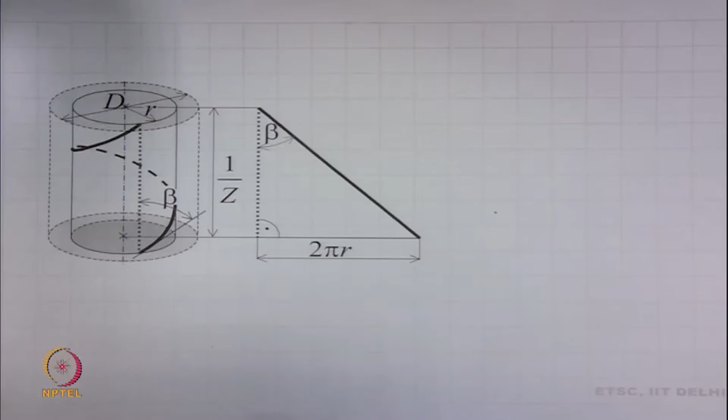Helical model of fibers in yarn. We recapitulate this model. A general fiber is situated at a radius r in the yarn. It makes an angle beta from the yarn axis. If we cut the yarn along its axis and unravel it, we obtain this triangle. The base of the triangle is 2 pi r and the height of the triangle is 1 by z, where z denotes yarn twist and beta is this angle.

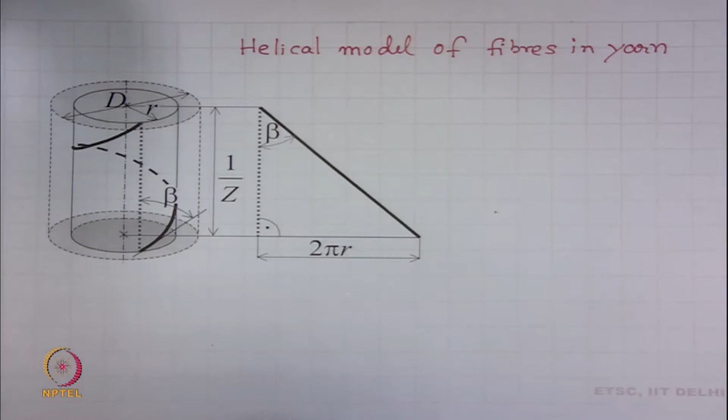So, if we apply trigonometry, we can find out tangent of beta is 2 pi r times z. Now, of course, there will be a fiber which is situated at diameter d as well. In that case, for that fiber we will write tangent of beta d is pi times d times z.

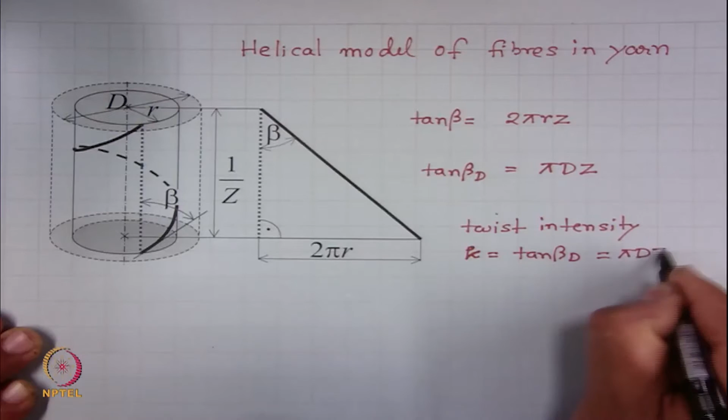In theory of yarn, this quantity has a name which is known as twist intensity. Generally we denote the symbol kappa for this, which is equal to pi times d times z. This is a very well known expression, as we know from helical model of fibers in yarn, and we consider helical model of fibers in yarn in this module too.

Now, what is yarn shrinkage? Let us first define this. A cotton yarn contracts its length due to washing. This phenomenon is called yarn shrinkage.

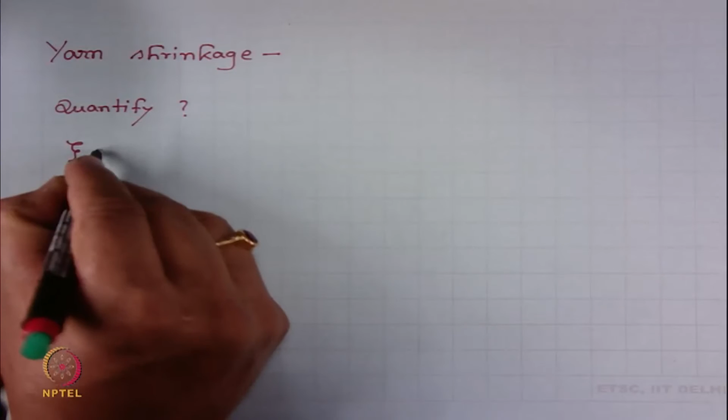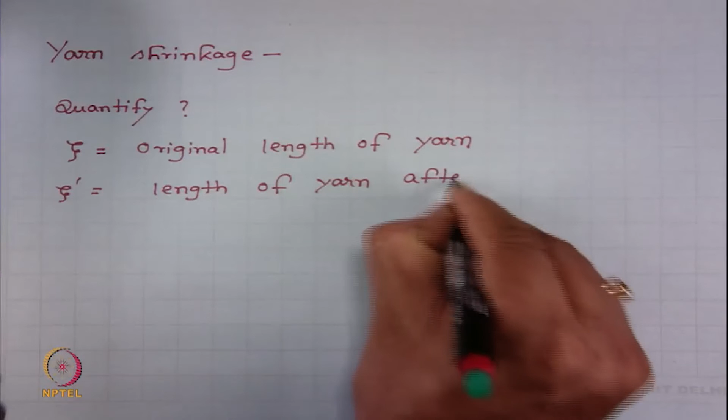How do we quantify this effect? Let us consider zeta is the original length of yarn. If we wash this yarn in hot soap solution, then its length will shrink. Suppose this is the length of yarn after washing and drying.

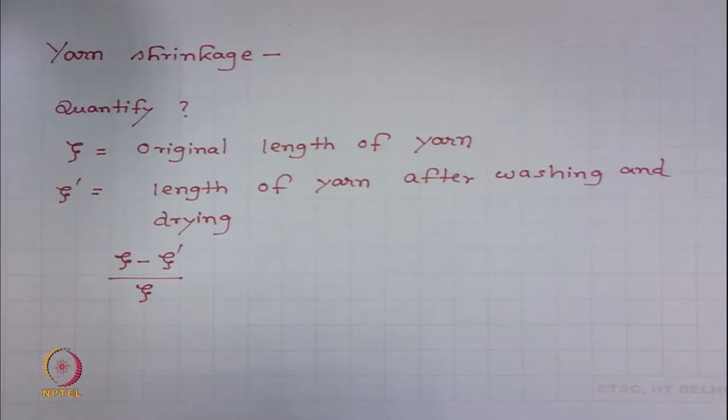So, what is the change of length? Zeta minus zeta prime is the change of length, divided by original length. This is how we quantify shrinkage. Phi is yarn shrinkage. So, yarn shrinkage is defined by the change in length due to washing divided by original length.

We can write this further as this. So, this is how we define yarn shrinkage.

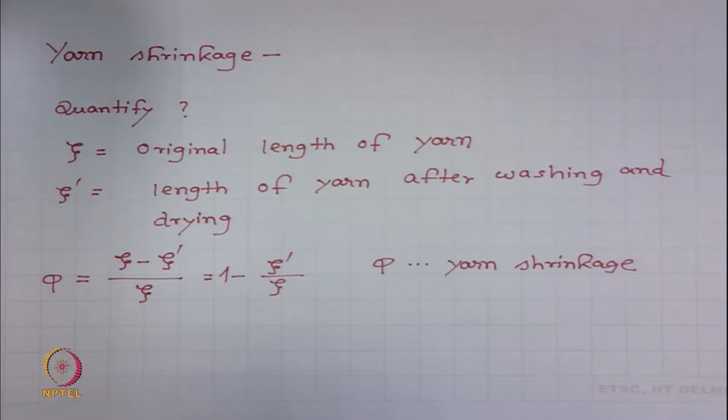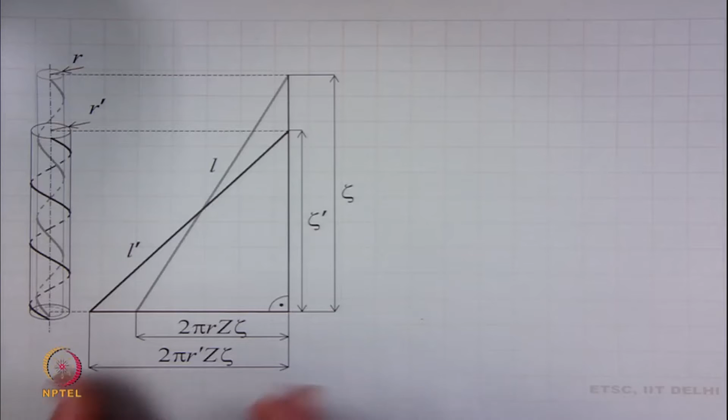After washing and drying, the same fiber will have a different length. Let us consider that length is L prime, and of course the radius will change. So this base will be now 2 times pi times r prime z into zeta, and this length is L prime. We consider the number of coils z times zeta does not change because of washing and drying.

So, if we apply now the Pythagorean theorem to the initial fiber length, L square will be equal to zeta square plus 2 pi r z zeta, square. Similarly, if we apply the Pythagorean theorem to the triangle after shrinking, then we will obtain L prime square equals zeta prime square plus 2 times pi r prime z, square. This equation, the second one, can be written in this form.

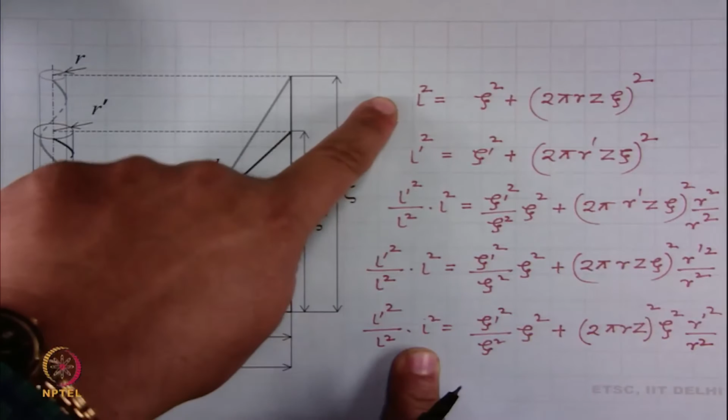Now, this L square we will substitute from this equation. So, what we will get is L prime square by L square zeta square plus 2 pi r z zeta square. This is equal to zeta square plus 2 pi r z square zeta square r prime square by r square.

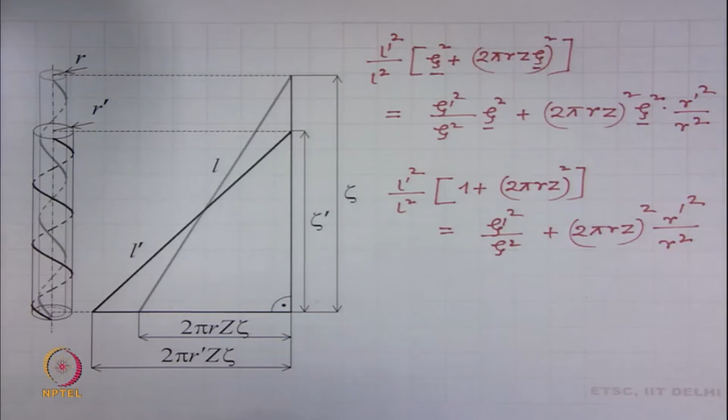Now, in all these quantities this is common, so it can be removed. So, what we get is 1 plus 2 pi r z square is equal to zeta prime square zeta square plus 2 pi r z square by r square.

So further we can write this expression, this plus 2 pi r z square into this by this is equal to plus 2 pi r z squared by r square.

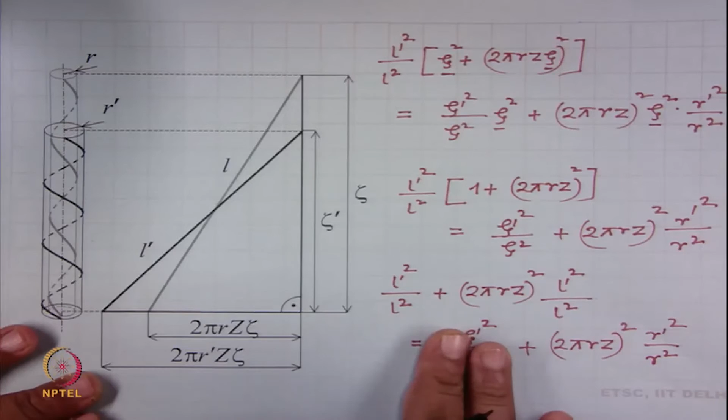Now this equation we can further write as, so what we do in the earlier expression, now this expression is somehow related to shrinkage. So we will keep it in the left hand side, rest all in the right hand side. If we do so, then we obtain is equal to minus this.

All right, how we define shrinkage? Change in length by original length is equal to this. So this by this is equal to one minus this, isn't it?

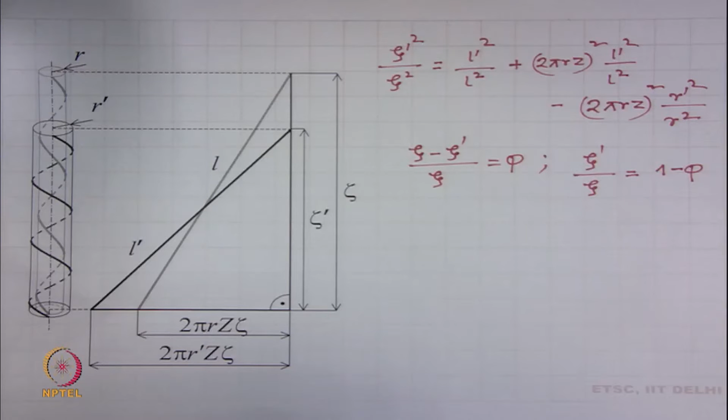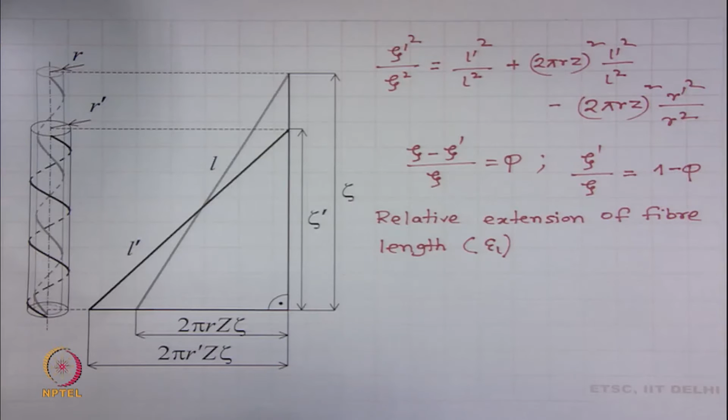We now introduce two quantities. One is relative extension of fiber length. We symbolize it by epsilon subscript L. How we define it? Change in length divided by original length. So L prime by L minus 1. So L prime by L is equal to 1 plus epsilon subscript L.

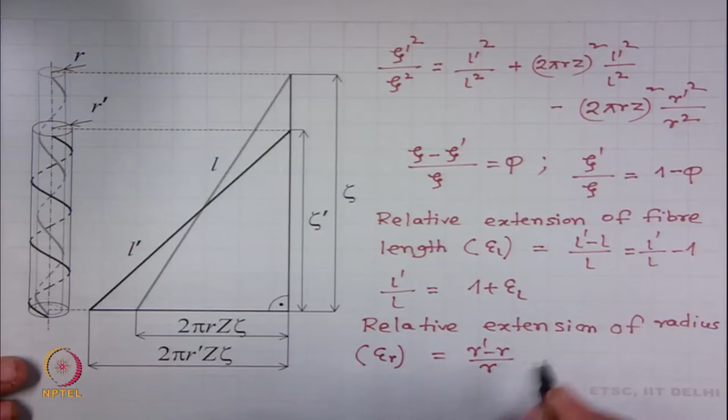We also introduce another quantity here, that is relative extension of radius, epsilon r, change in radius by original radius. So we can write plus this.

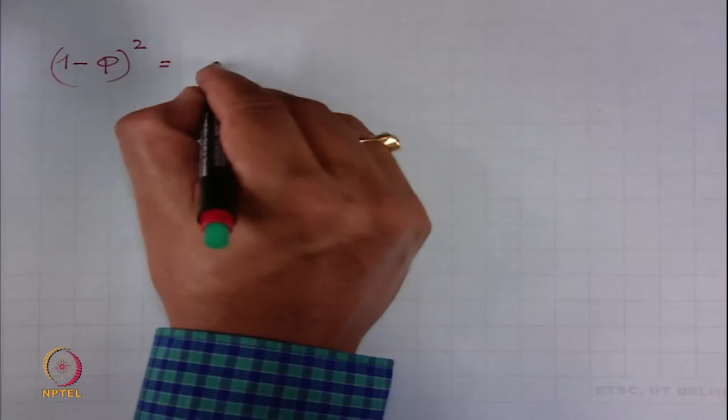Now these three expressions we substitute here. So this becomes 1 minus phi square. So finally we obtain is equal to L prime by L is 1 plus epsilon L square plus 2 pi r z square common L prime by L minus 1 plus epsilon r square.

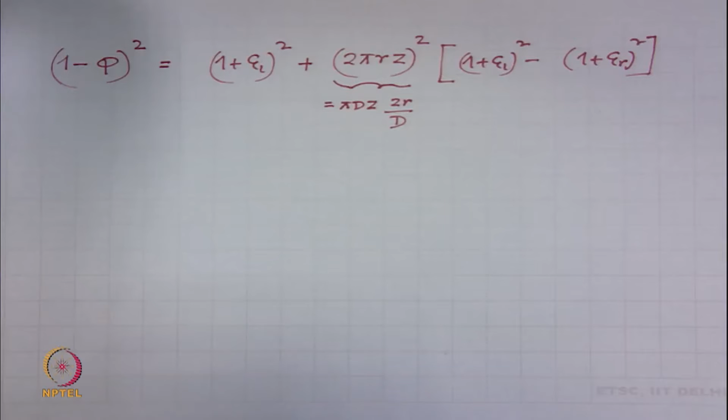Now, what does this equation tell us? It tells us a very interesting story. These parameters epsilon L, twist intensity kappa, epsilon r, this diameter d, they are constant for a given yarn. So for a given yarn, epsilon L, kappa, capital D, epsilon r are constant.

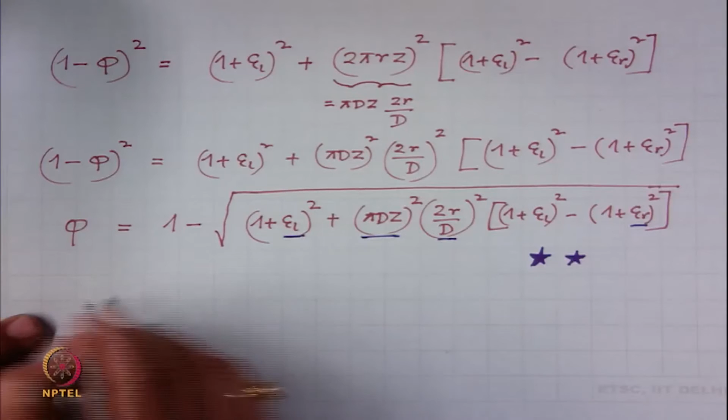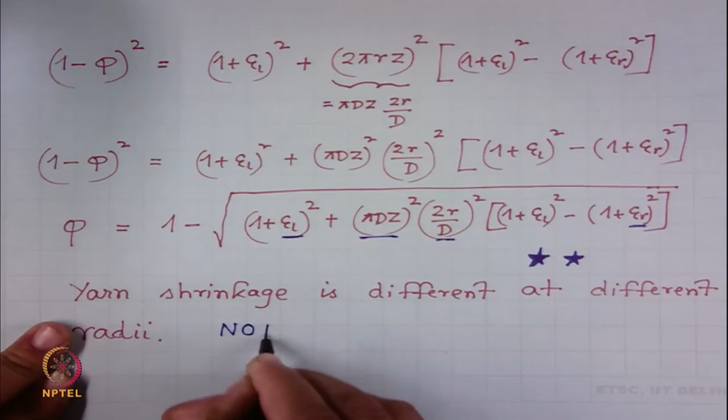So for that yarn, shrinkage is a function of radius. That means this equation tells us there will be shrinkage of yarn different at different radii. So yarn shrinkage is different at different radii. This is not possible. How can a yarn show different values of shrinkage at different radii? This is not possible. That means...

There is something interesting here, so we introduce one assumption. The assumption is that there exists a neutral fiber at a radius r equal to r star. That fiber represents the whole yarn in terms of shrinkage. So the assumption is something like this: there exists a neutral fiber at radius r equal to r star.

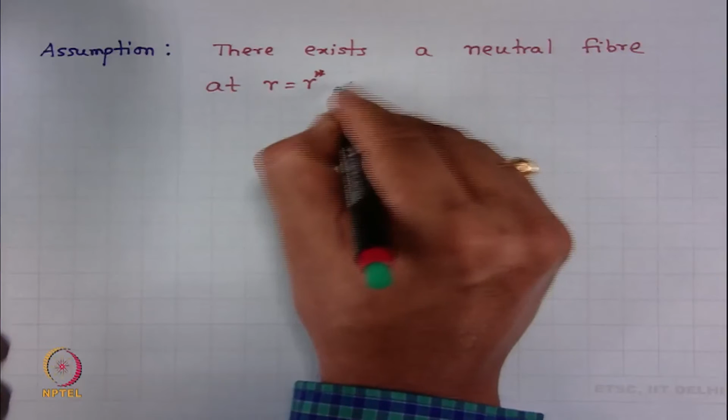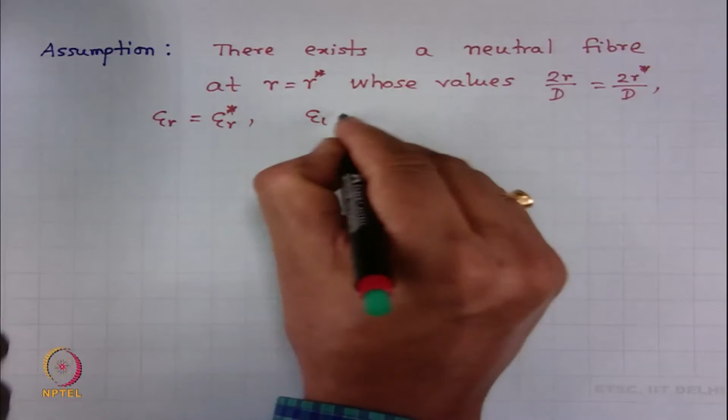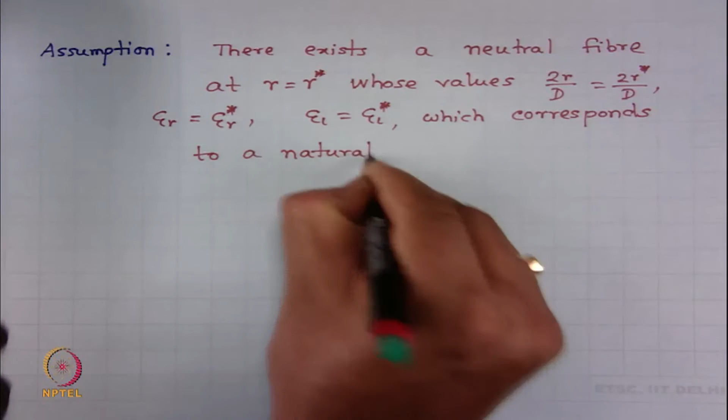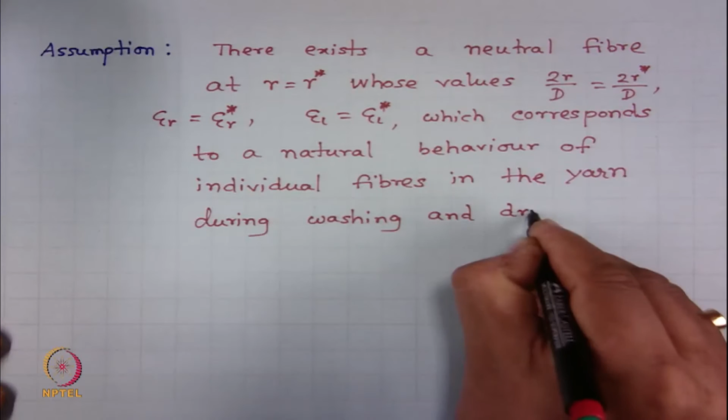Whose values say 2r by d is equal to 2r star by d, epsilon r is equal to epsilon r star, EL, EL star. These are the values. They correspond, which corresponds to a natural behavior of individual fibers in the yarn during washing and drying.

We imagine a fiber, a neutral fiber, situated at a particular radius whose values satisfy 2r by d equals 2r star by d, epsilon r equals epsilon r star, epsilon L equals epsilon L star, which corresponds to a natural behavior of individual fibers in the yarn during washing and drying. Then we are able to write, is equal to 1 minus...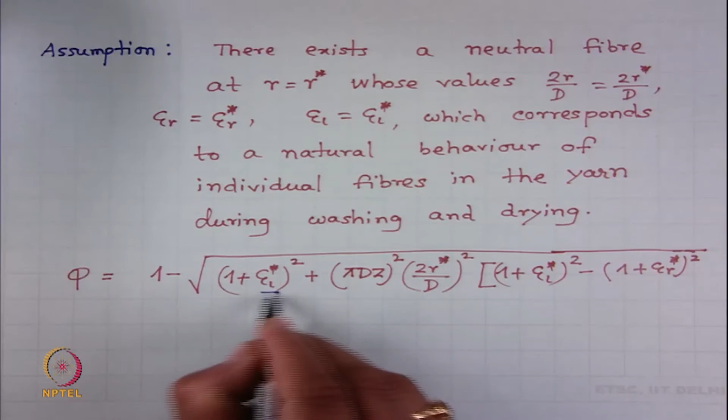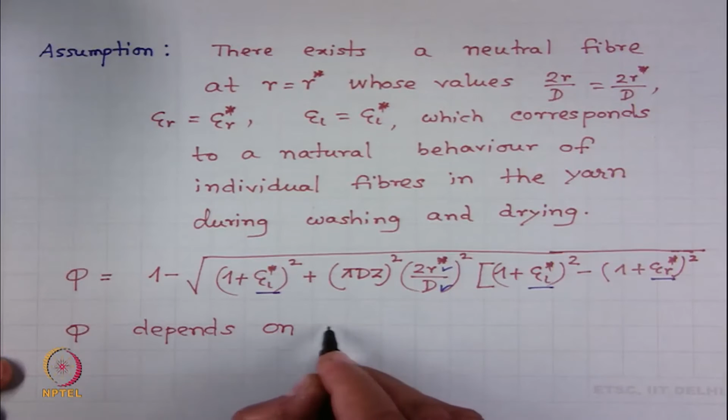So then this factor, this quantity becomes a constant, r star becomes a constant, d is a constant, this is constant, this is constant. So in that case yarn shrinkage depends on yarn twist intensity, pi d z.

So what we learn is yarn shrinkage depends on yarn twist intensity only. It is not only yarn twist, it is not only yarn fineness, it is not yarn twist, it is not yarn fineness, it is yarn twist intensity that dictates yarn shrinkage due to washing.

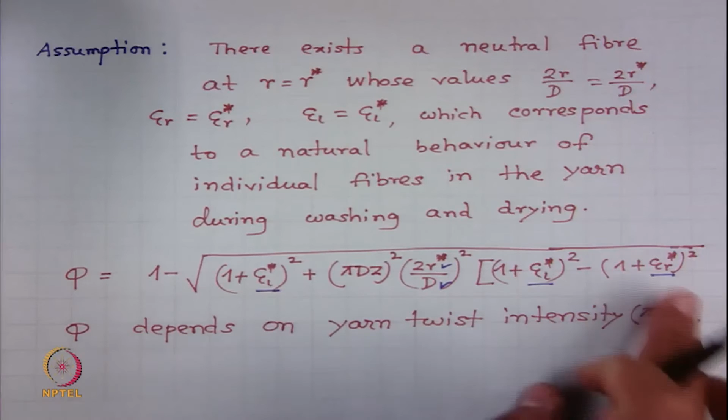Now we would like to talk about these quantities: epsilon L star, epsilon r star, and 2r star by d. About these quantities we would like to tell you.

First we start with the parameter epsilon L star. What is this parameter? It characterizes relative extension of fiber due to washing and drying. Generally speaking, in different literature you will see this value reported as 1.1% to 1.2%.

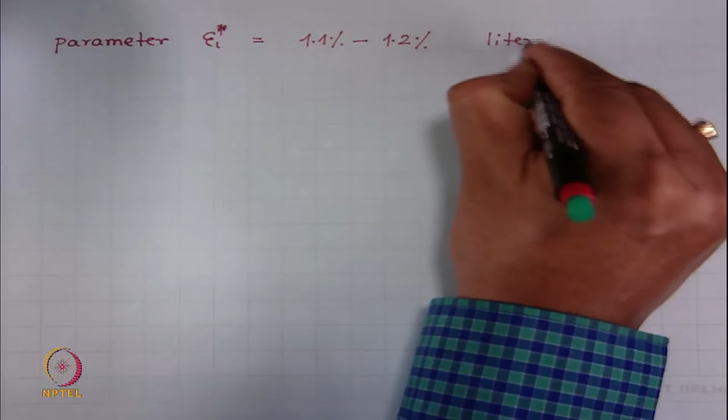In the book Physical Properties of Textile Fibers by Morton and Hearle, you will see that very similar values are reported for this quantity.

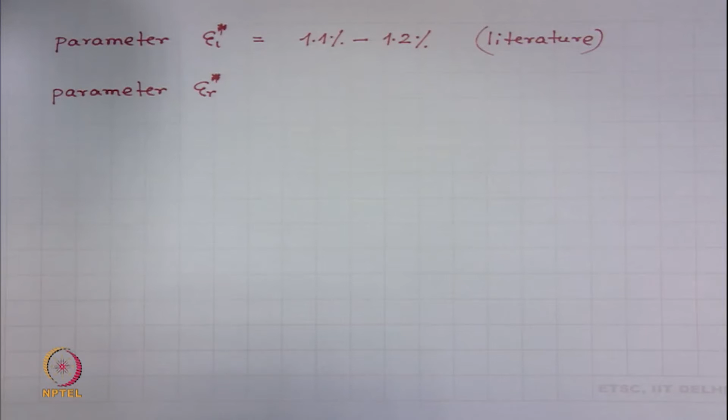Then comes another parameter, epsilon r star. What is epsilon r star? It characterizes relative extension of radius. This is generally reported as 9.5% to 28% in literature.

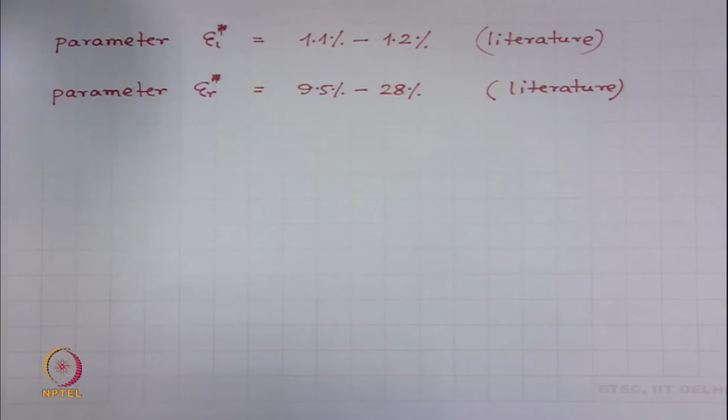Third parameter is 2r star by d. What is the value of this quantity? This is the relative position of the neutral fiber inside the yarn, right.

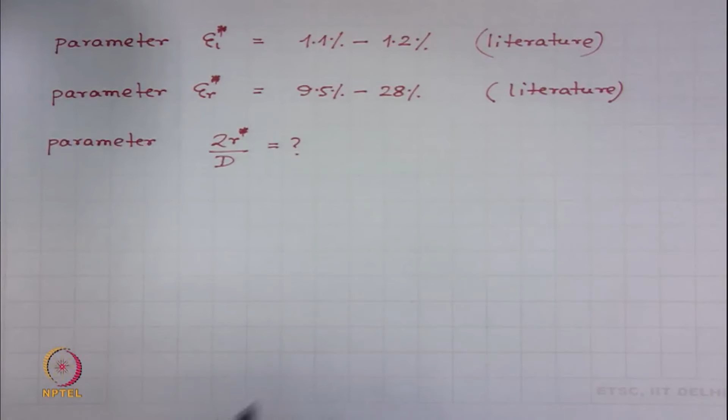Based on the helical model with constant value of packing density at each radii, we can estimate this position by dividing the area into two halves. That means, this radius is r star, and this is the yarn whose diameter is d. That means pi r star square is equal to half of pi d square by 4.

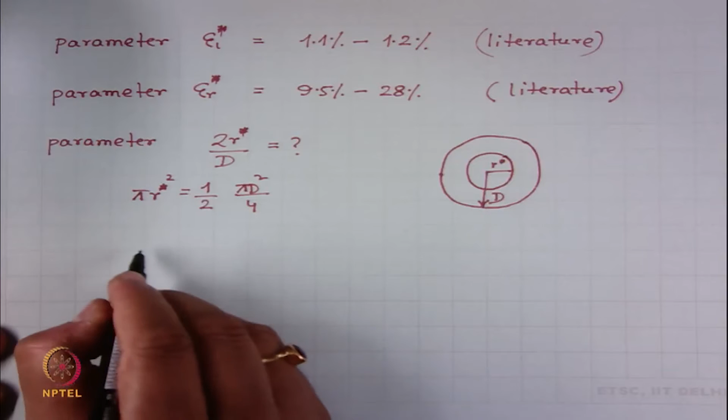So what will be the value of this quantity? This pi and this pi cancel out. So root 2, so 1 by root 2. So this becomes 1 by root 2. So 2r star by capital D is equal to 1 by root 2, that means this will be roughly equal to 0.7.

So based on the helical model with constant packing density, if we assume that where this neutral fiber exists, it makes the yarn cross sectional area into two equal portions, then 2r star by d is equal to 0.7. Now, of course, this quantity might be different for different technologically spun yarns - ring yarn, rotor yarn, air jet yarn, friction yarn - this value might be different. So this was about the discussion with 3 parameters.

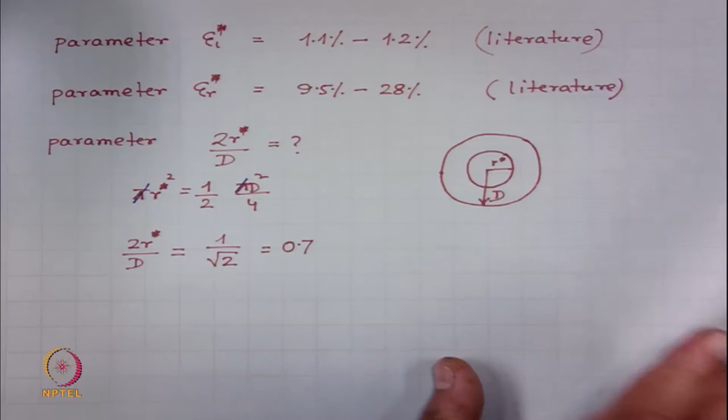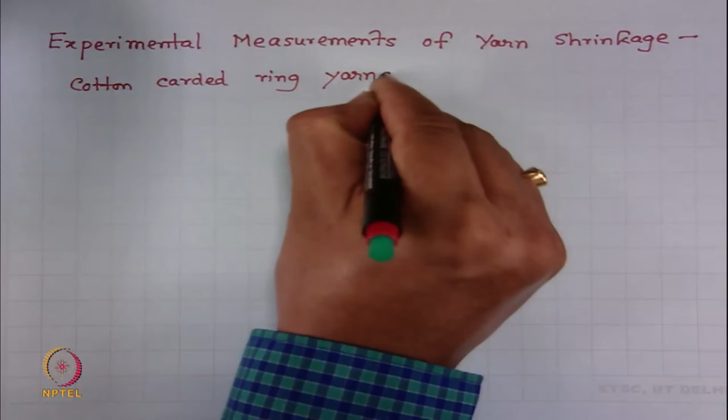Now we would like to go for experimental measurement of shrinkage. In this particular study, cotton carded ring yarns were taken. So how was the yarn length measured?

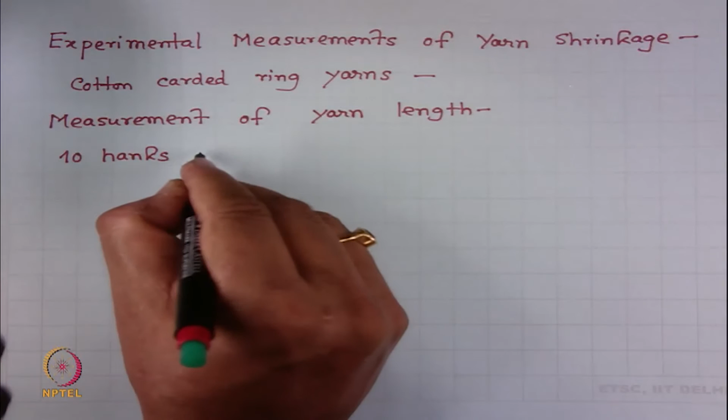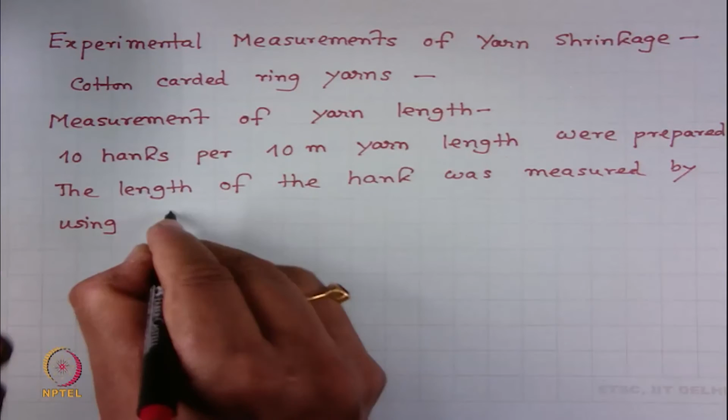What was done is 10 hanks per 10 meter yarn length were prepared. The length of the hank was measured using an Instron tensile tester after applying a pretension.

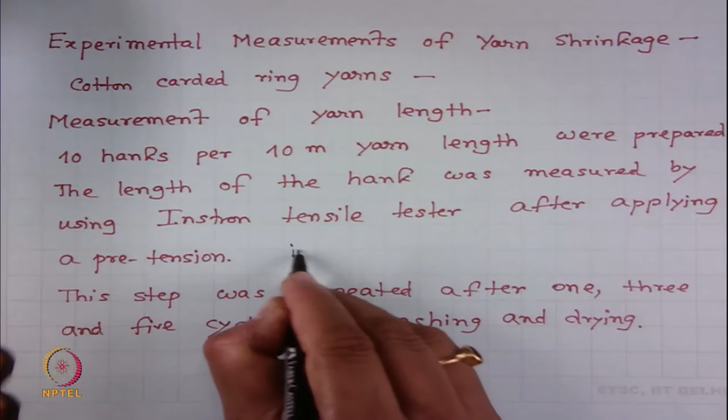After applying a pretension, this yarn underwent one cycle of washing and drying, then this step was repeated after 1, 3 and 5 cycles of washing and drying. This gives you initial length, and these measurements gave you length of yarn after the first cycle, after the third cycle, and after the fifth cycle. From these differences we obtained shrinkage values at different cycles - first, third and fifth.

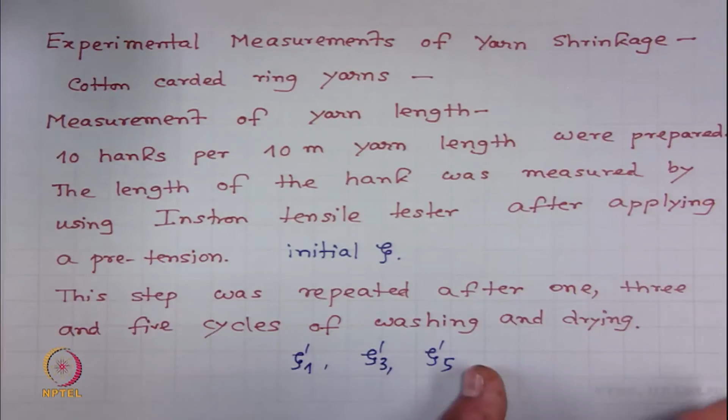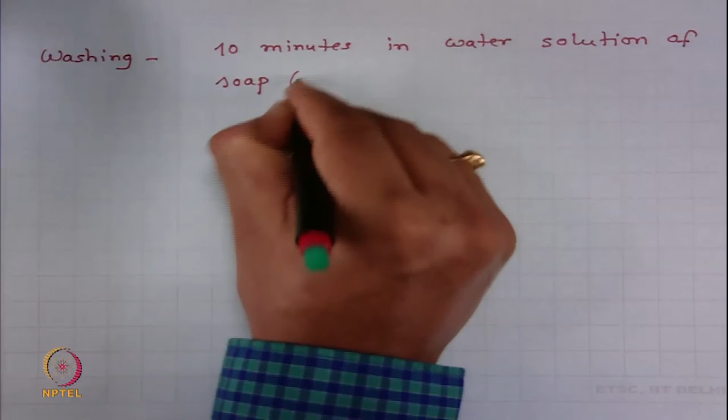How did we wash this? Washing was carried out for 10 minutes in a water solution of soap, 3 grams per liter, and soda, 2 grams per liter, at 90 degree Celsius temperature. This was followed by rinsing using distilled water.

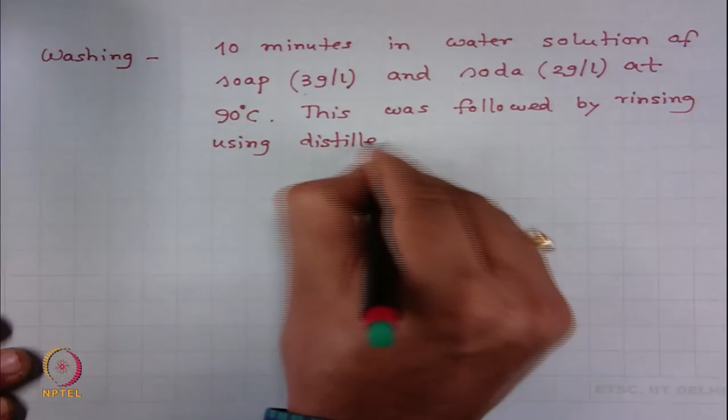So, this is how we carried out washing and how we carried out drying. Drying initially was carried out on air for 6 hours.

Then four hours at 60 degrees Celsius.

After that, conditioning at 20 degrees Celsius and 60% RH for 24 hours. So, this is how the experiment was carried out and we measured the shrinkage and we obtained the results.

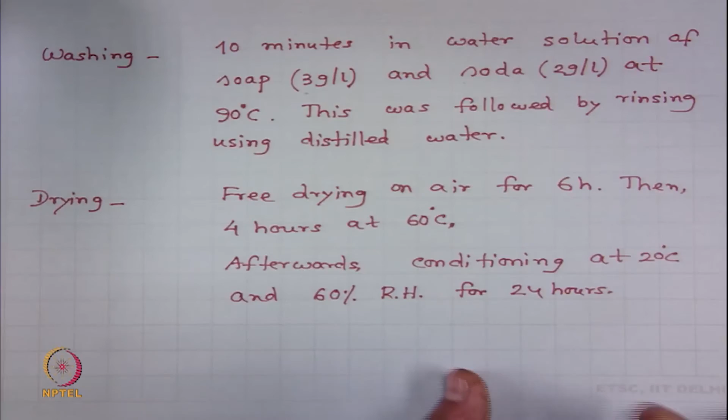I will show you now the results.

These are the experimental results of shrinkage after one cycle of washing and drying. We used many yarns, cotton carded yarns, all were cotton carded yarns, but of different counts.

16 tex a star, so wherever you will see star, that corresponds to 16 tex. Wherever you will see plus, 40 tex; plus, 40 tex; rhombus, 100 tex; 20 tex; 50 tex; 30 tex; 70 tex. So, different fineness of yarns we prepared.

And we obtained the value of pi times d times z. So how did we measure diameter? Yarn diameter was also measured.

Twist measured. From there we obtain pi dz, yarn twist intensity. So this yarn twist intensity we plot along the x axis, and these are the results corresponding to the first cycle of washing and drying shrinkage.

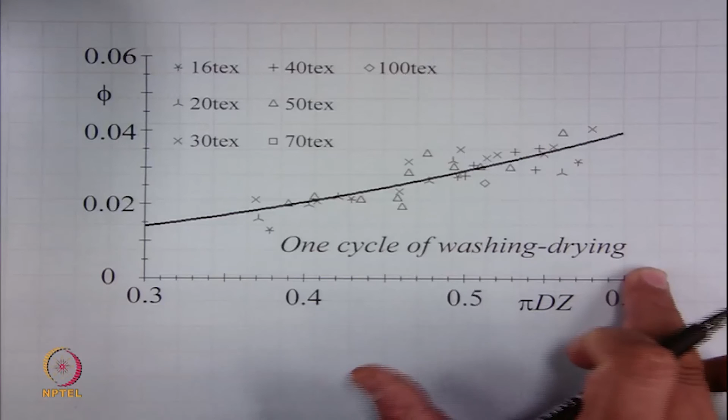And this line is coming from theory. What is the expression of this line?

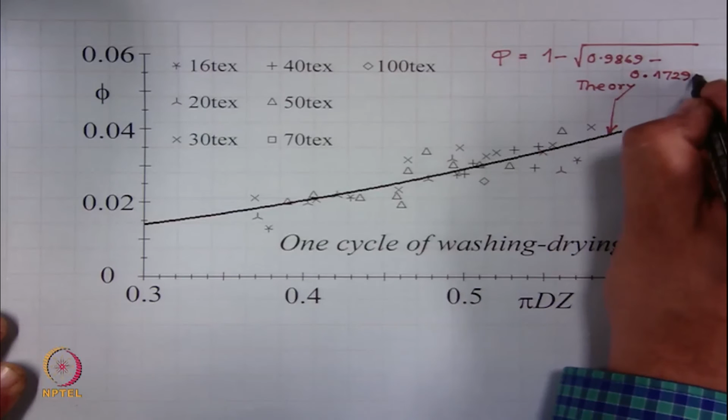1 minus root over 0.9869 minus 0.1729 into pi dz square.

Now let me tell you one thing here. As we have seen, this expression is 1 plus this minus pi dz square into 2 r star by d square.

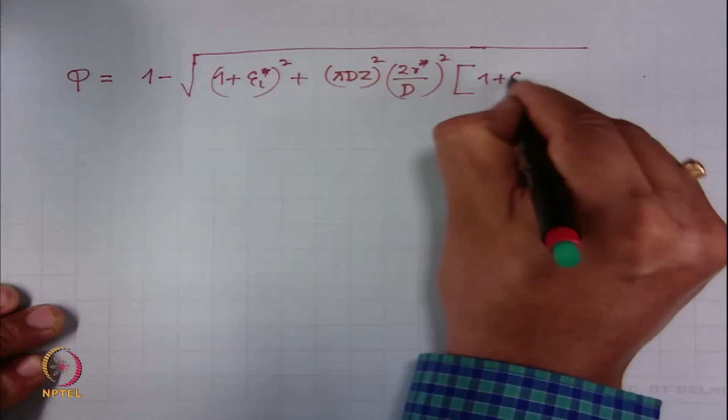Then we consider 1 plus epsilon L star as equal to A, and 2 r star by d into 1 plus epsilon L star minus 1 plus epsilon r star, this we consider as B.

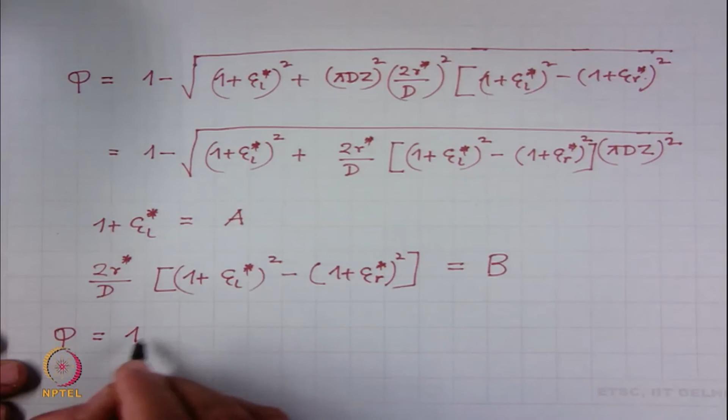Then we will be able to write yarn shrinkage as 1 minus root over A plus B into pi dz square.

So this line was obtained by using statistical regression technique, and the equation what we used for regression is phi is equal to 1 minus root over A plus B into pi dz square.

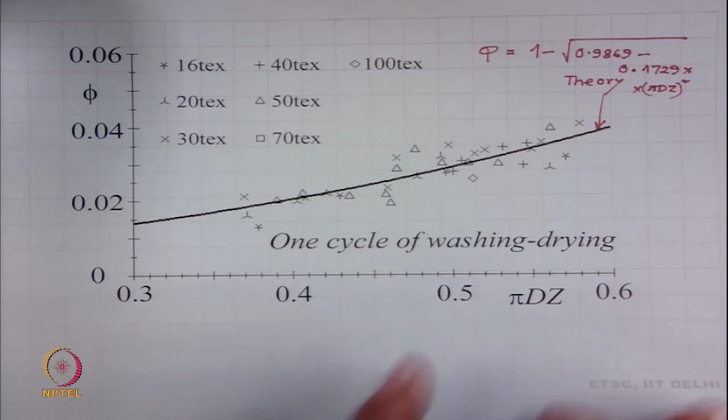By using statistical regression technique, we obtained the values of A and B. These values are written here.

So, for the first cycle we obtain 1 minus root over 0.9869 minus 0.1729 into pi dz squared.

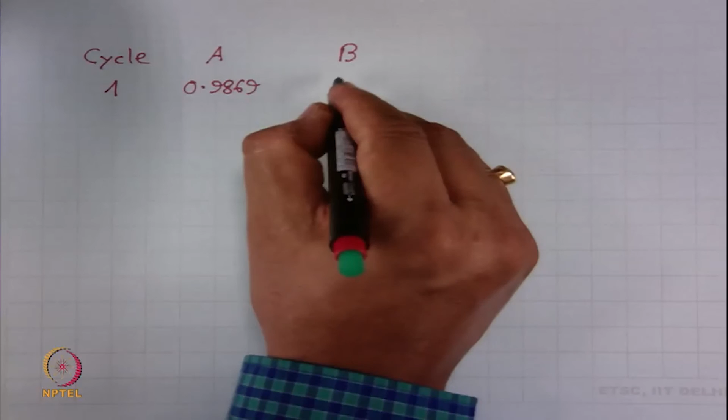So, for cycle 1, what is the value of A? The value of A is 0.9869. What is the value of B? The value of B is minus 0.1729, right, for cycle 1.

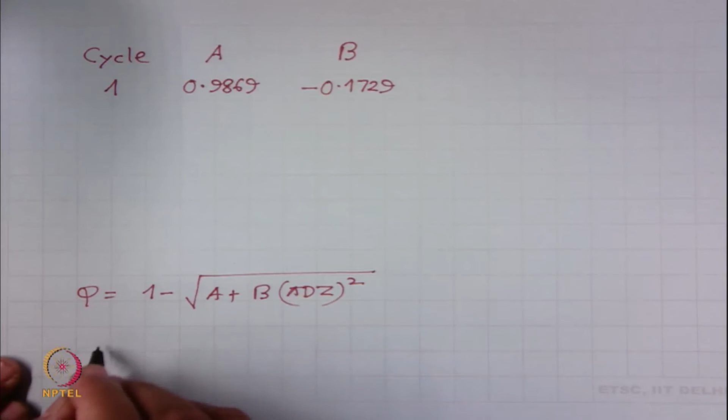Now, if we see here, phi is equal to 1 minus root over A plus B into pi dz square. A, what is A? A is equal to 1 plus this. So we will be able to obtain this value.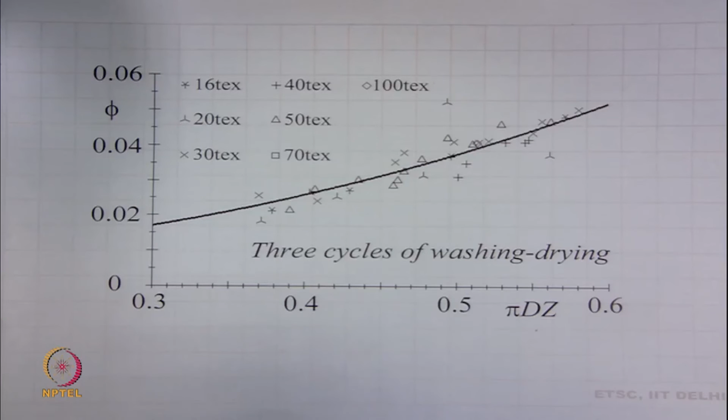So for this, what we found, similarly this thick line comes from theory. So what is the value of shrinkage after third cycle? 1 minus root over 0.9937 minus 0.2888 pi dz square. So this line follows this equation.

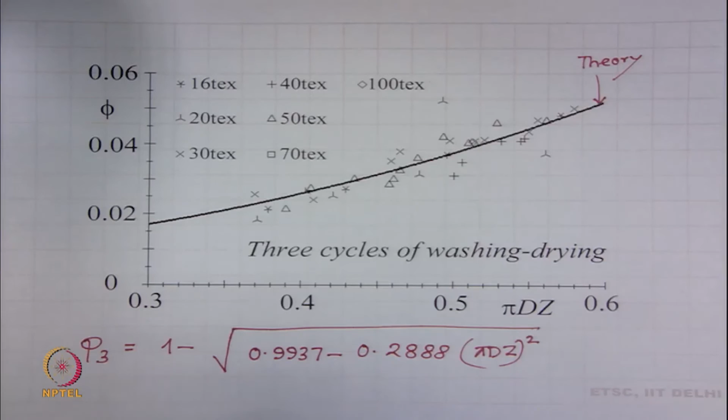This we obtain from statistical regression technique. So what is the value of A? For third cycle, the value of A is 0.9937 and the value of B is 0.2888.

Similarly, we measured yarn shrinkage after 5 cycles of washing and drying, and after 5 cycles of washing and drying we obtained this result. Similarly, this comes from theory. After 5 cycles we obtained 1 minus root over 0.9865 minus 0.3018 pi dz square.

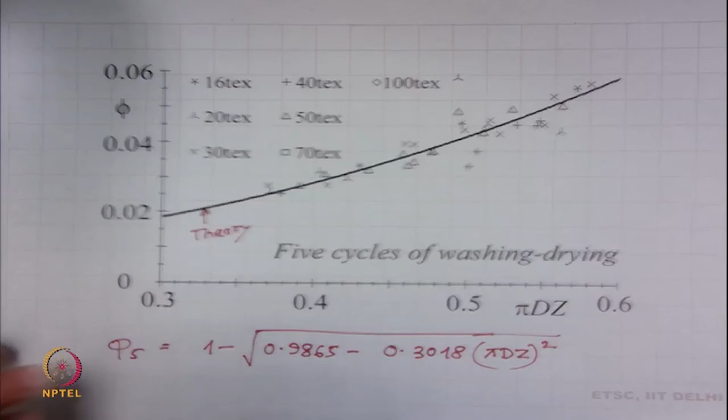So, the value of A is this, the value of B is this after 5 cycles. For 5 cycles, the value is 0.9865 and minus 0.3018 is the value after this.

Now if we use A from this table, we will obtain the value of epsilon star. This value was obtained as this. Similarly, if we substitute A here, we will obtain the value of epsilon star for the third cycle, it was this. Similarly, if we substitute A equal to this in this equation, you will find the value of epsilon L star, this value will be minus 0.007.

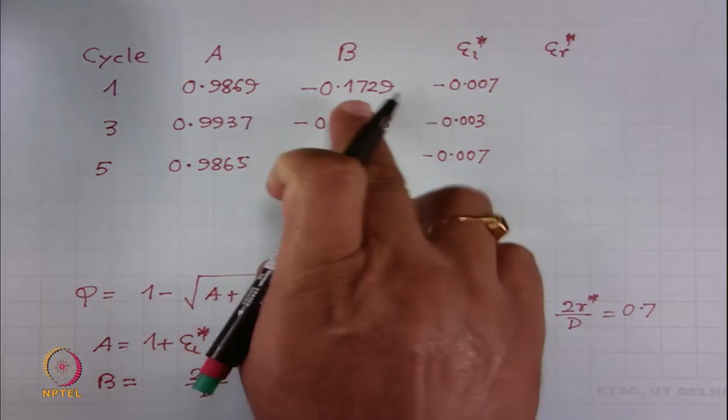You know B already for first cycle, third cycle, fifth cycle. You know epsilon L for first cycle, third cycle, fifth cycle. You know 2r star by d is equal to 0.7, we consider it.

By using this equation, you will be able to find this value epsilon r star, the relative extension of radius. This value was for the first cycle 0.157, for the third cycle 0.258, and for the 5th cycle interestingly it was 0.266. What we see is that this difference is much higher than this difference.

So probably with the number of cycles of washing and drying, epsilon r is probably... after a few cycles there is a plateau that comes in.

Now, why does it happen? Because yarn structure initially, because of washing, it swells and it shrinks. So it opens up. Once it opens up, then further swelling is probably not possible. That is why this plateau comes. So after 5 cycles of washing we did not find much significant difference in results.

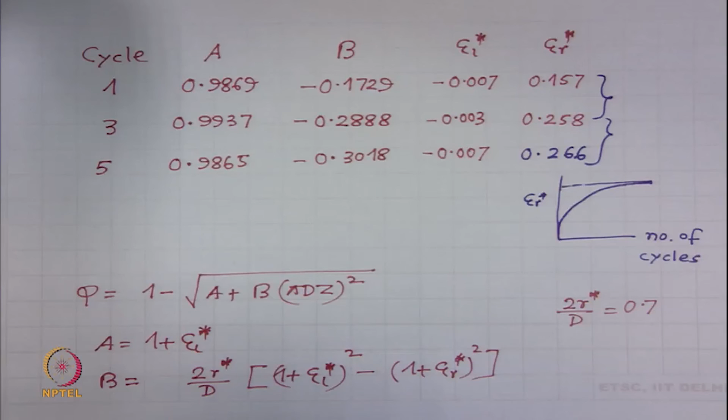So what we see is that our equation of this form is able to explain the experimental results quite satisfactorily. So probably the way it was imagined, the helical model and then simple extension of the helical model, the shrinkage of yarn was explained satisfactorily. Now we would like to solve one numerical problem on this module.

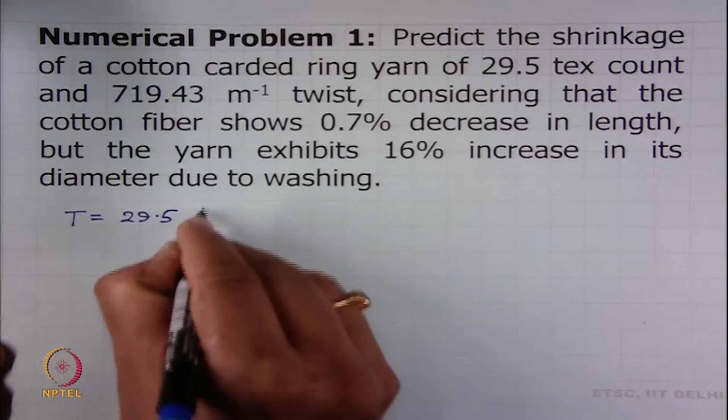The numerical problem is like this: predict the shrinkage of a cotton carded ring yarn of 29.5 tex count and 719.43 meter inverse twist. So this yarn has a count of 29.5 tex, it has a twist of 719.43 meter inverse. Considering that the cotton fiber shows 0.7% decrease in length, minus 0.007.

And the yarn exhibits 16% increase in its diameter due to washing. So diameter increase and radius increase will be proportional, 0.16. So you have to predict the shrinkage. Okay.

So, shrinkage you have to find out, yarn diameter. Diameter is not given, twist is given, count is given, diameter is not given. So if we go back to module 4...

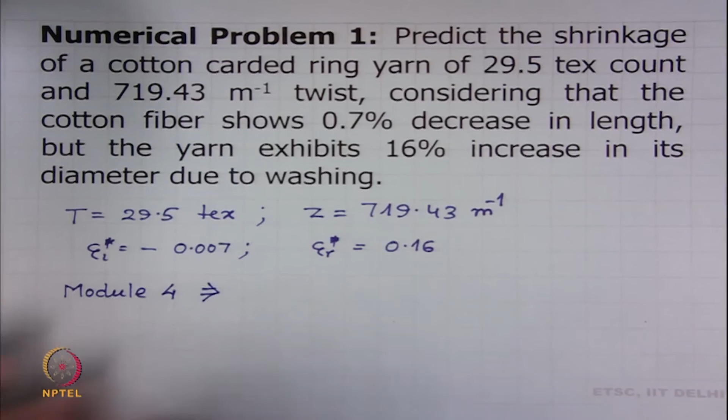...we can find out diameter. How do you know? We will use this expression. Only thing is that we need to know about packing density, because for cotton fiber rho can be taken as 1520 kg per meter cube, capital T is given as 29.5 tex, what is not given is mu.

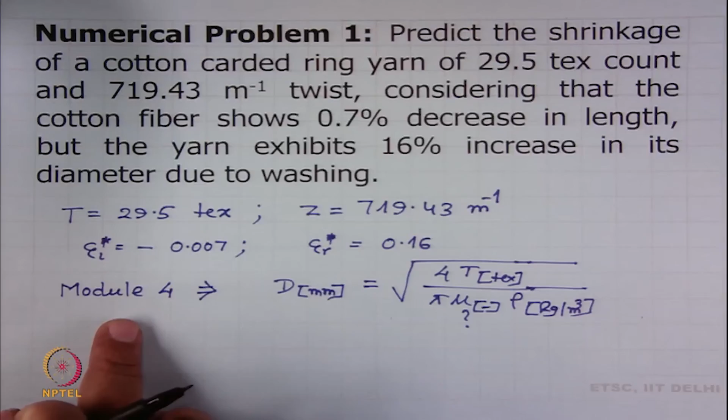So we have to use module 4 formulas to find out mu. Which formulas? If you remember this equation: Z square T to the power half. This equation we derived in module 4.

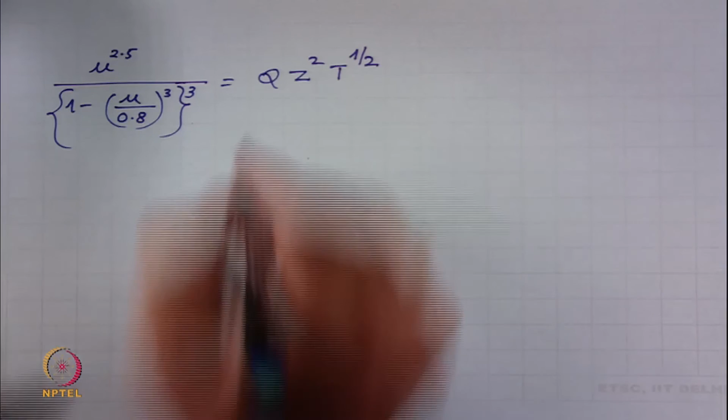The value of Q for cotton carded ring yarn is 9.61 into 10 to the power minus 8, Q. And Z was 719.43 square into T to the power half, T is 29.5 to the power half. This value, you will see, will come as 0.2702.

If you solve this by using a suitable numerical technique, or by a table prepared before - please refer to module 4 - then you will find mu is equal to 0.46 for this yarn. If you now know mu is equal to 0.46, then you substitute here 4 into T, T is 29.5.

3.14 into 0.46 into 1520. This value you will get as 0.2318. So you now know D, the moment you know D, 0.2318 millimeter.

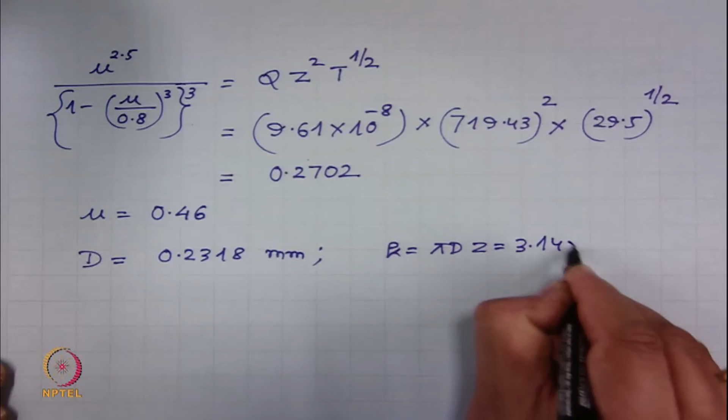What will be the value of kappa? Pi times D times Z. So 3.14 into 0.2318 into Z, 719.43 meter inverse. So this you will get as 0.5236. This will be the value of kappa.

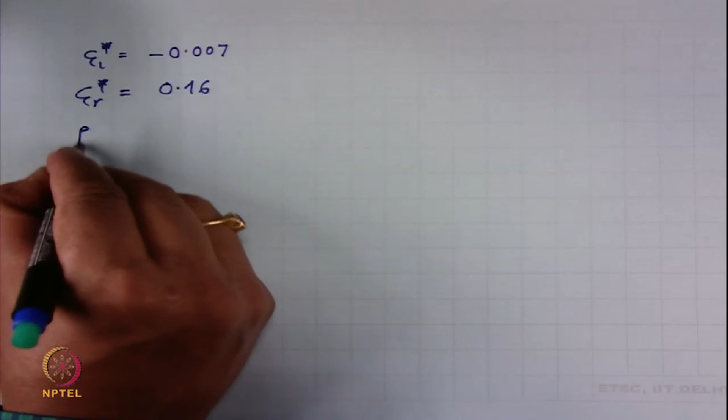So now you know all values. You know this value 0.007, you know this value, you know kappa. We will consider this, then shrinkage is equal to 1 minus...

...1 plus epsilon L star squared plus kappa squared, 2R star by D squared into 1 plus epsilon L squared, minus epsilon R squared.

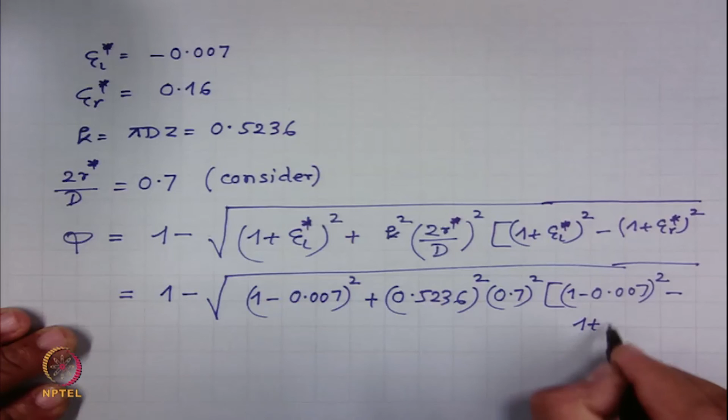This ends the solution of this problem, and also this ends this module 7.